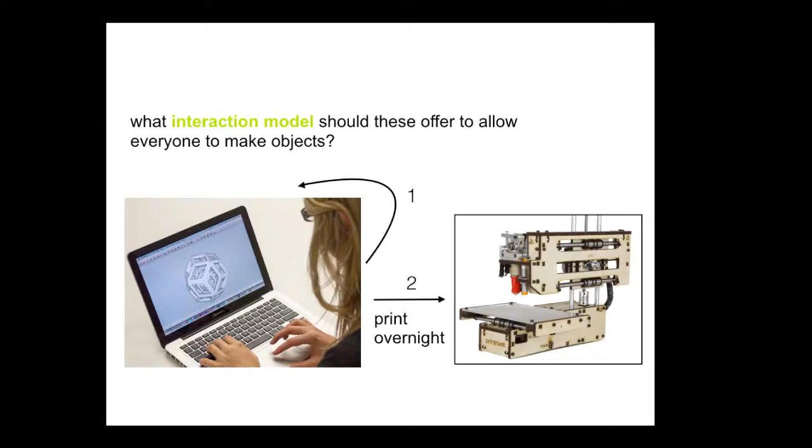The reason why we currently use this interaction model with the delayed feedback is because 3D printers are very slow. If you print something the size of the glasses, it easily takes a couple of hours. If you print something that's slightly larger, it requires overnight printing.

This overnight printing, overnight processing interaction model probably sounds very familiar to many of you, because we have seen this before somewhere else. In the early days of computing, users also had to first generate an input, then send it to the machine, and the next morning they could see the result. In case they made a mistake, they had to wait another night, try again, until they finally succeeded.

As you can imagine, since the feedback is so much delayed in this interaction model, it's really limited to expert users, because you really have to know what you are doing in order to succeed at the end.

However, in personal computing, we are today at a point where everybody can use a computer. So what did change in the interaction model?

First, when processing got faster, users could now work more in a turn-taking style interaction. They could type something in the command line, get feedback. If they made a mistake, they could try again quickly.

Then second, when we moved from expert command line tools towards more direct manipulation with the graphical user interface and natural user interaction, users could now work hands-on on the data instead of remembering all these expert commands.

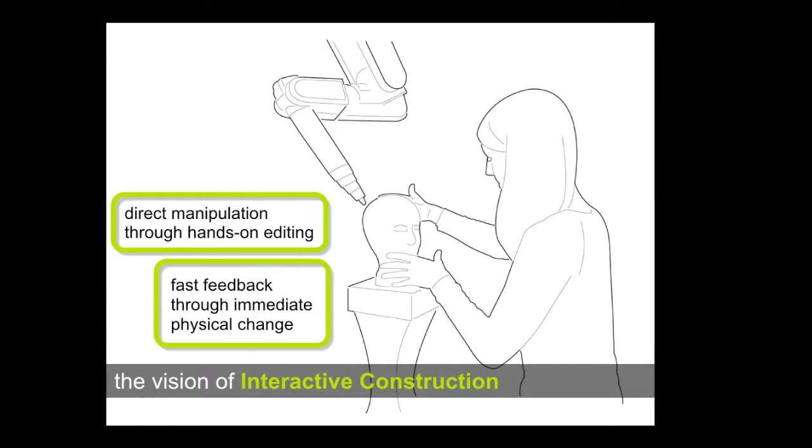So when I started my research, I started out with the general question: how can we actually make fabrication faster, because it's currently so slow?

And for this, I got inspired by the history of computing. When processing was slow, researchers suggested a method called low-fidelity rendering to give users an early preview.

So I applied the concept to fabrication. Instead of always doing a full, slow, high-fidelity print, I suggest that we only spend printing time on the part that's currently being tested,

and the rest is replaced with a low-fidelity context material. So you can see this idea: intermediate versions are low fidelity, and the final version is then high fidelity.

So I developed a range of low fidelity techniques for different prototyping goals, and I'm going to walk you through three of them. The first one was with a focus on modularity.

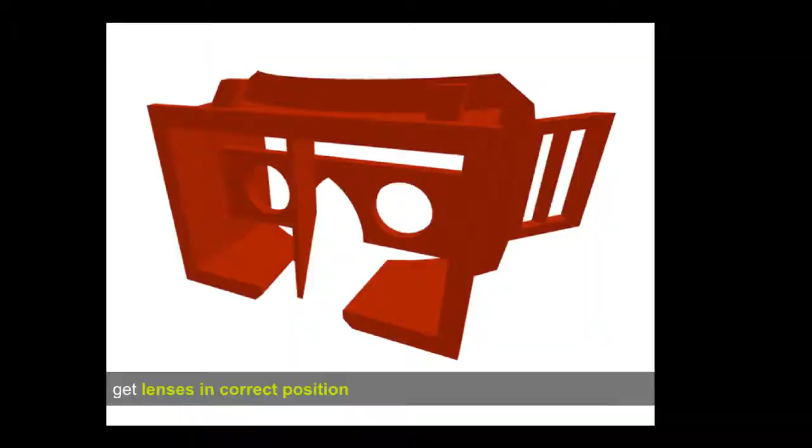So let's take this example of the head-mounted display body here. I'm currently prototyping this. It's a virtual reality headset. You attach your phone, and can experience some 3D stereography image.

And the first thing I want to find out is if the lens distance to the display is right. If the lens is too close, the image is blurry; too far away, the same thing.

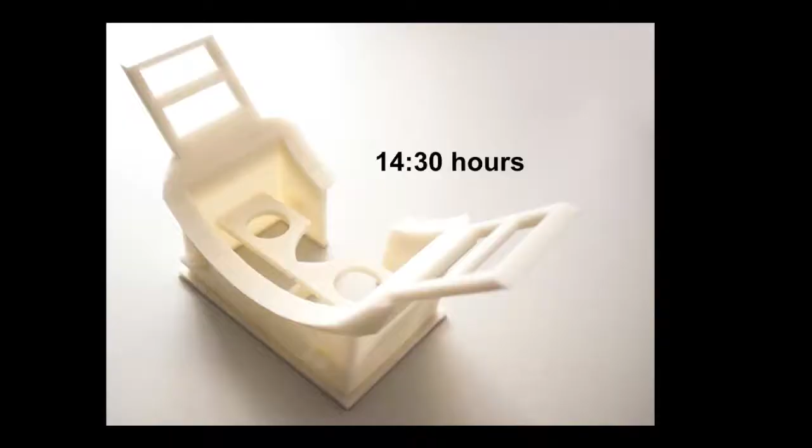So in a normal process, you would spend more than 14 hours waiting for the first version. However, here I decide to use our software. So I load the 3D model.

And now with just a few clicks, I can convert this into a low fidelity representation.

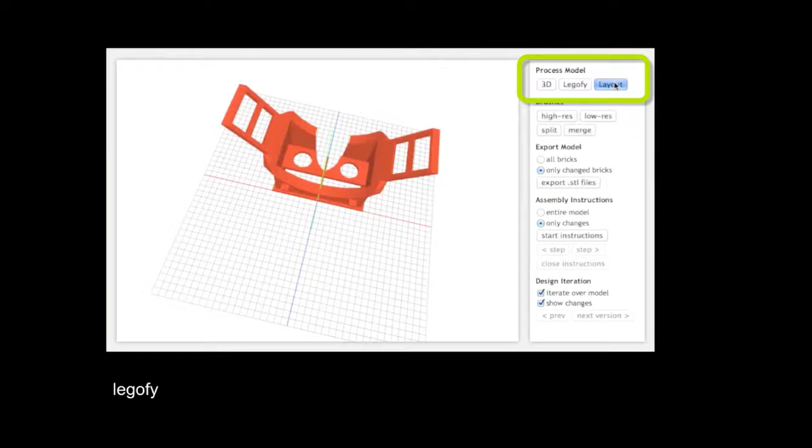And now that I have this low fidelity representation, I can go in and say, but here, this part I want to have high fidelity. Here I want to spend my time on.

So when I'm done selecting my part, I simply click the export button. I get the 3D printable file. You can see there's also an ID engraved.

And now while this part is printing, I can already start assembling and just insert the part once it's ready from the 3D printer. You can see there are on-screen instructions that tell me how to put the model together.

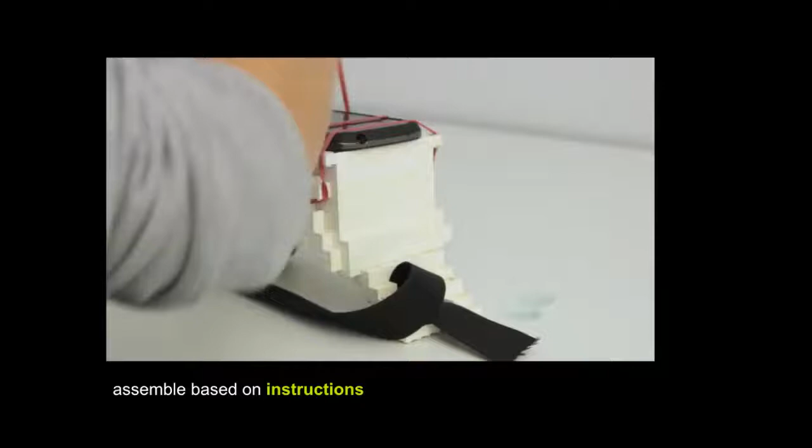So as I said, this is not a final version, it's an intermediate prototyping iteration version. And now you can have one where you can actually test the functionality in already 1 hour instead of waiting overnight to the next day.

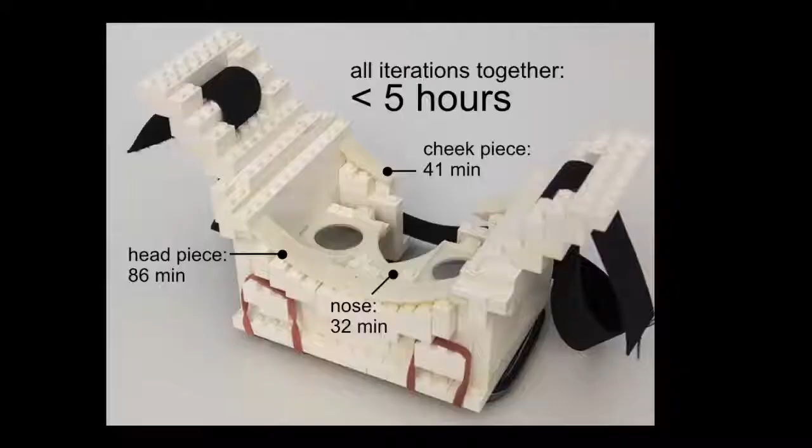And as you can imagine, this modular approach allows you to then take off parts and test different versions, for instance, for the forehead piece here, making it exactly the roundness of your head, nose piece, etc.

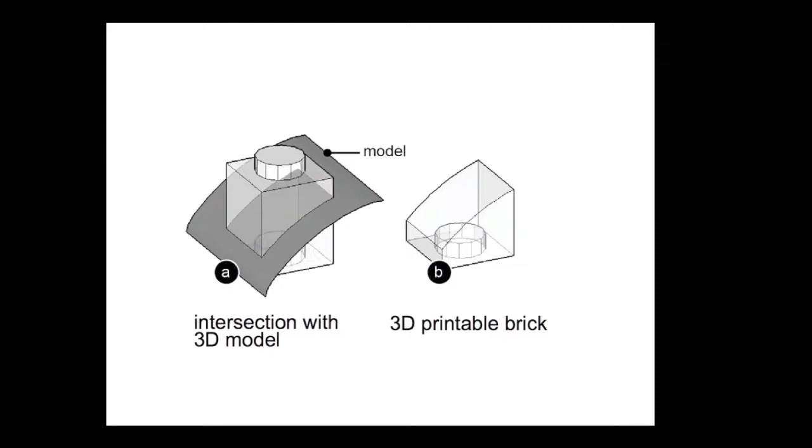Then also, when we generate the custom geometry for the bricks, we have to intersect bricks with the original model. And sometimes things can happen, such as that a part of a knob is cut off, which we then need to reconsider in our layout algorithm, because this knob cannot be used to create a stable connection.

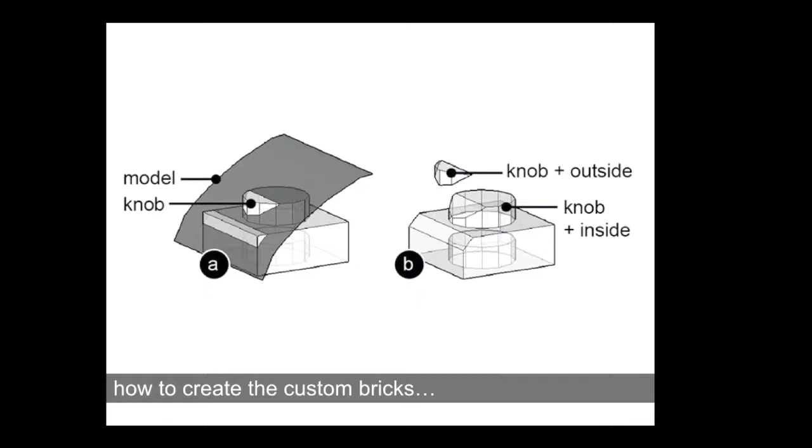So the Lego version I showed you was really great for modularity, but as you can imagine, especially when you have the head-mounted display on your head for a while, there are pull forces to the back. The bricks are very modular, but also fall apart after some time.

So we developed a second low-fidelity technique, which takes a 3D model and converts it into a representation for laser cutting of 2D plates.

So you can see the same model I showed you before, but now it only takes 20 minutes to actually fabricate a first version. And with our software, you can also select different conversion types that you want. For instance, here you can see that the head part is 3D printed, the rest is laser cut.

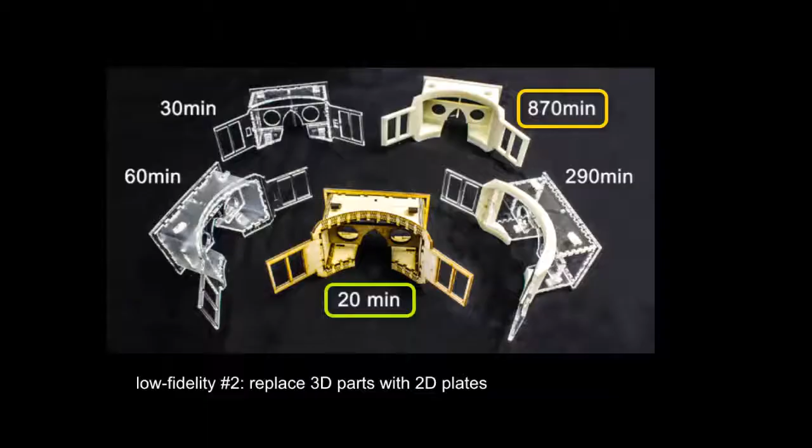So again, we provide a piece of software. You load your 3D model, and then you have one slider where you can drag from fidelity towards speed. As you drag towards speed, we replace more and more parts with parts for laser cutting.

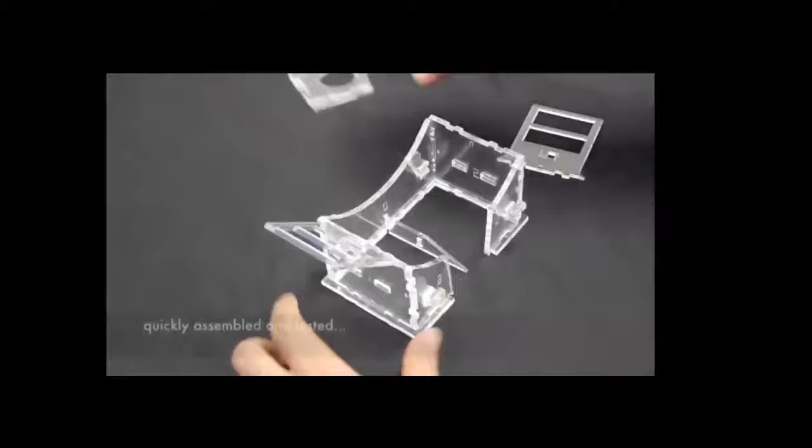What is always really important for me from the user interaction side is that the user does not need to have any low-level domain knowledge. He simply clicks the export button, gets the file, sends it to the device, gets assembly instructions, and puts it all together.

To find the plates, we first group all neighboring faces with the same normal, and then we look for planes that have an opposite normal within a certain distance d. This distance d is the laser cut thickness of the acrylic plates that your cutter supports.

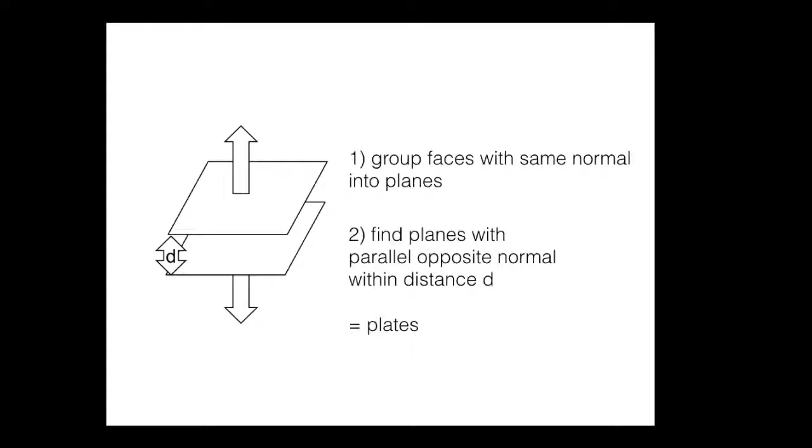It's mainly used for calculating the different conversions as the user drags the fidelity slider. At the beginning, you can see we are on high fidelity, so everything is labeled 3D print. But as we keep dragging towards speed, all these segments are then labeled laser cut.

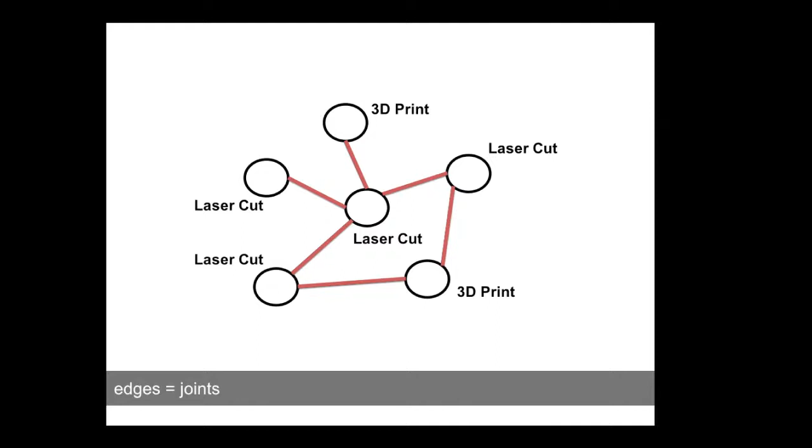Each edge then represents a connection between the segments. By default, this is just finger joints, so tabs that click together. But we also support something that's a one-dimensional bend.

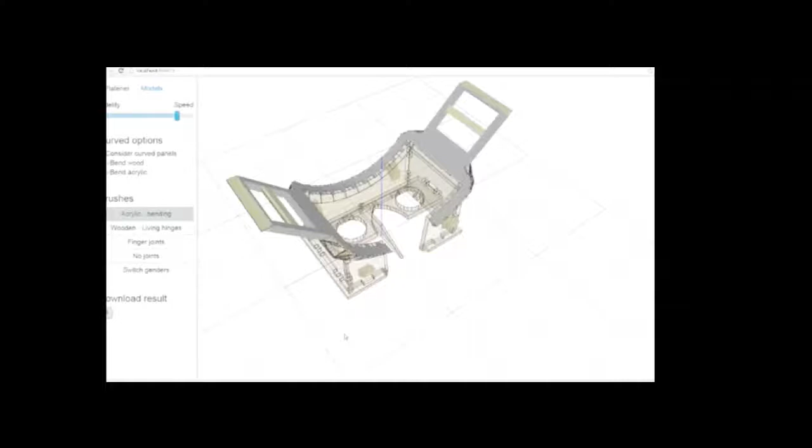If you have a heat gun which allows you to bend acrylic, you can simply go into the software and say this here should be bent. Then when you export that file, our algorithm flattens it. You can then laser cut it and bend it into the final shape.

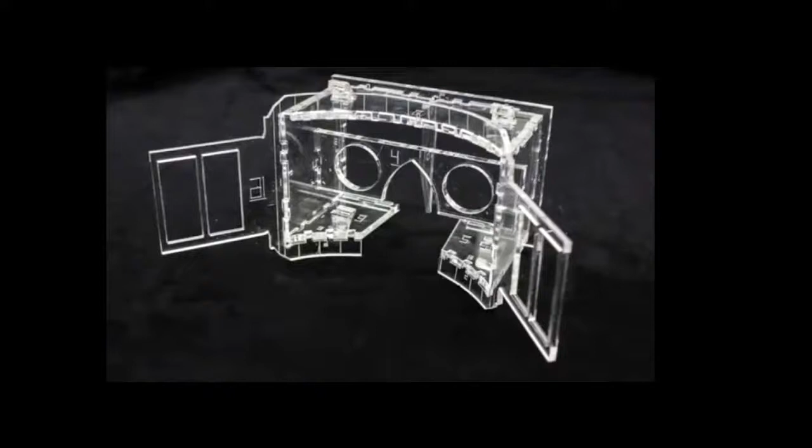In the case of bending, we also use the plate graph, but this time we also have to check if all of these segments are laying on a one-dimensional curve.

To evaluate our technique, we downloaded more than 2,000 meshes from Thingiverse, which is a 3D model database, and we automatically piped them through our conversion algorithm.

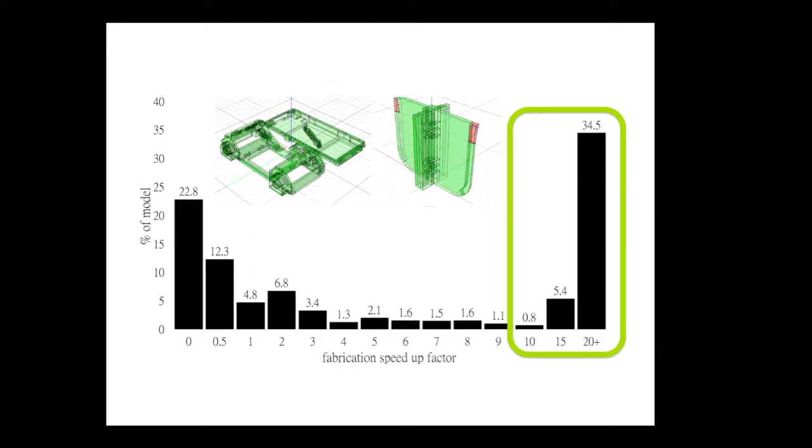We found that for more than 40% of the models, we have a speedup factor of more than 10 times. If you think about it, you can do 10 times more iterations in one day.

Of course, on the other side, there are also some shapes which don't work well. Anything that has a curved shape is really hard to represent on a laser cutter.

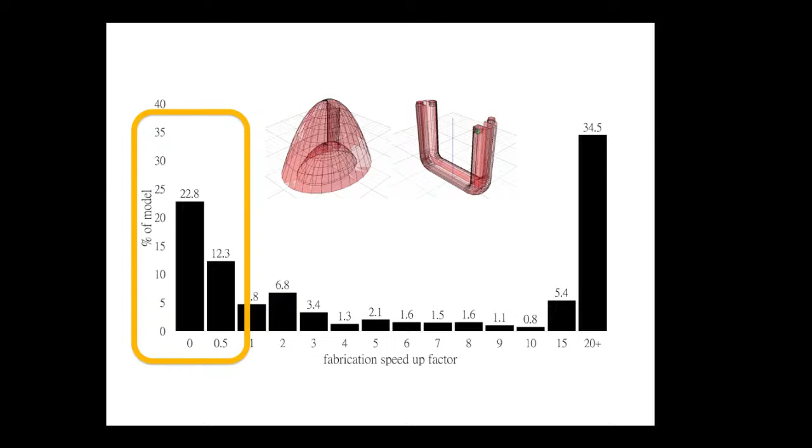Which actually brings me to my third low-fidelity technique I want to show you, fulfilling this matrix of different techniques, which is for shape objects.

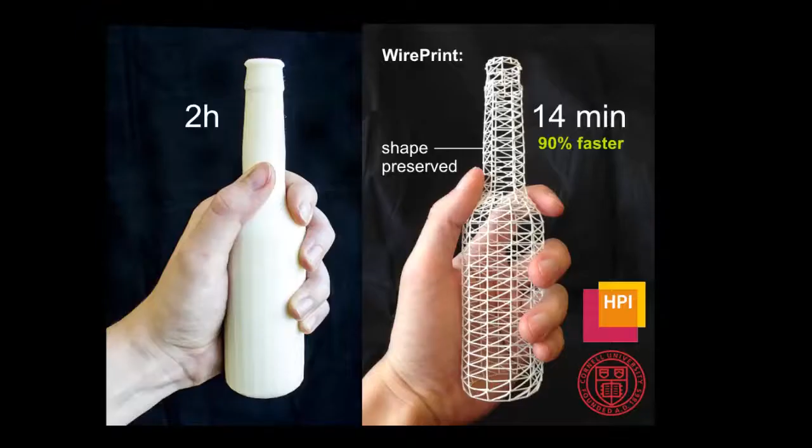So here you can see this. Instead of printing a high-fidelity version with a solid surface, we suggest printing a wireframe. In this way, you save more than 90% of the printing time.

The great thing here is, as you can see, the overall shape is preserved. So if you want to test something, like the ergonomics of this bottle in your hand, you can still test this with the low-fidelity version.

The reason why WirePrint is actually so fast is because we generated a special printing technique here. Normally in 3D printing, you print layer-wise, so it's like one layer on the next layer on the next layer.

But as you can see here, we also print in the Z direction, so we also print upwards. And this is what makes it so fast.

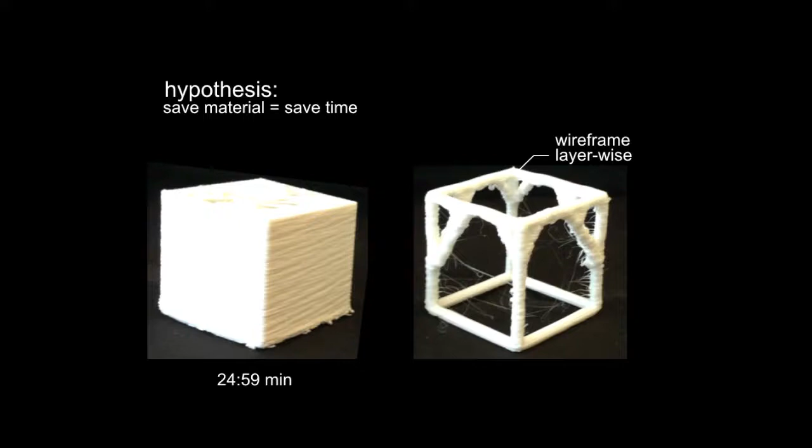However, when we initially started, this wasn't clear to us. Our initial idea was, okay, if we save material, we are probably also going to save a lot of time. So we printed this cube here layer-wise with solid walls, and the other one, a wireframe, also layer-wise.

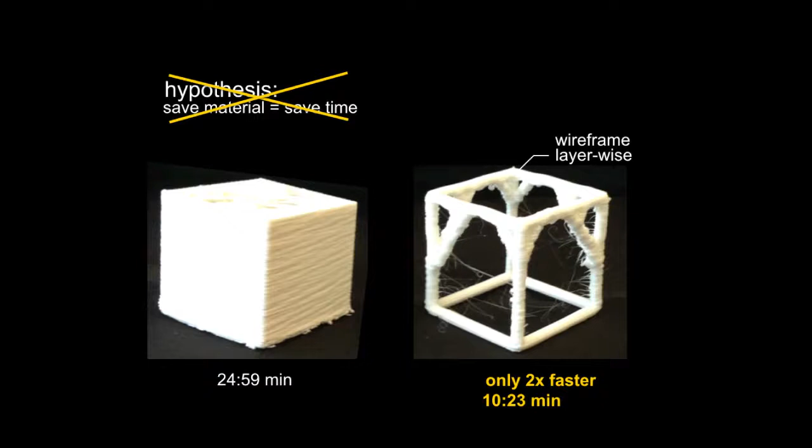What we found here is, wow, we save a lot of material, but actually the speedup is not that large. It's like roughly 2 times faster. So the question was, why is that actually?

We found out that the printhead still has to go to each corner on each layer. So the printhead path remains almost the same no matter if you print a wireframe layer-wise or a solid surface.

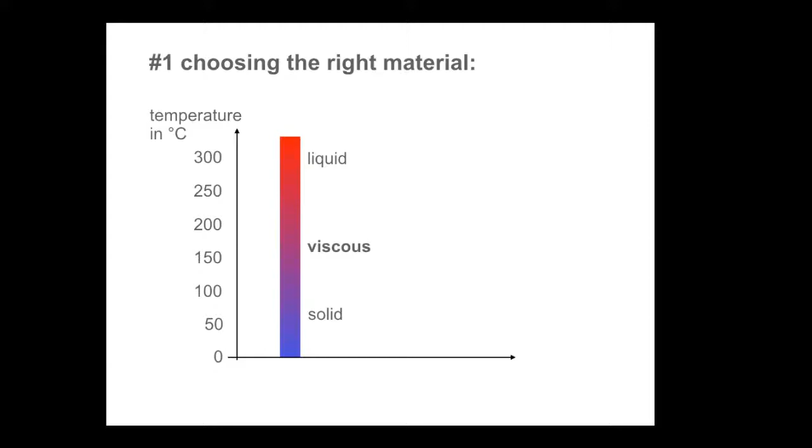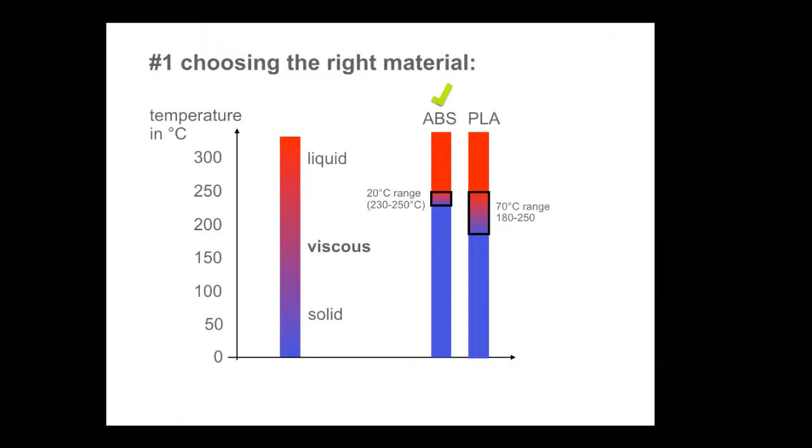So we found 3 ways how you can support the solidification. The first one is to choose the right printing material. Materials are not only liquid and solid, as we all know, but there's also a range where they are viscous in between. The right material for us actually has a very small transition range from liquid to solid, so it solidifies very quickly in that small range. In our case, ABS plastic worked best.

And then there's a third way how you can optimize the solidification. It's actually in software, so 2 ways. Either you print very slow as you go and you let the material solidify as you go, or second, you print very fast but you pause at the critical feature points, everywhere where you could get one of these potential deformations.

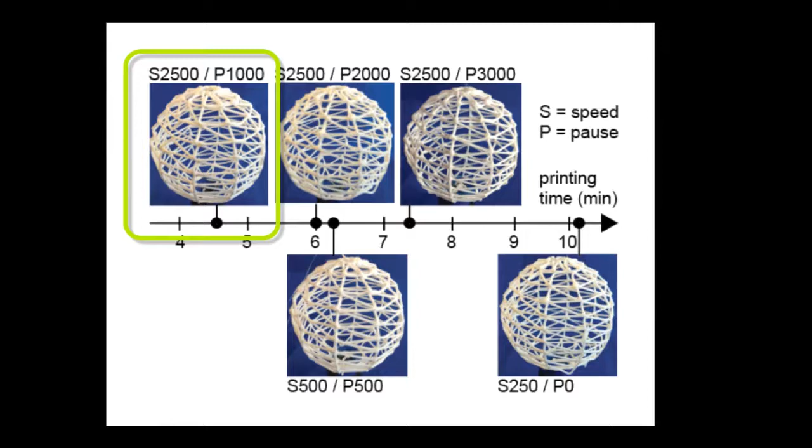So we ran an experiment where we varied printing speed and pausing. On the bottom right, you see the slowest printing speed, 0 pause. And here you can see fast printing speed, but a 1-second pause at all the critical feature points. And we found that this works actually best, so it has the smallest printing time while still preserving overall print quality.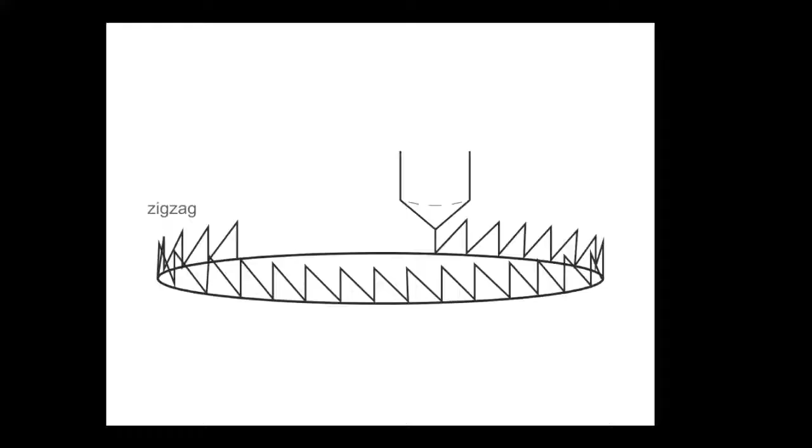Still, as you can see here, there are different conversions that fulfill these constraints of the print head. I'm just going to explain the one here on the left to you. So the new edge pattern that we use always prints a contour, then a zigzag on top, and then another contour on top.

This allows us to convert any 3D mesh that has a surface representation into one of our wireframe patterns. Some features I want to point out: we have different slicing heights, so on the ear you can see the top parts are thinner sliced than the bottom parts. We support geometry splits in the middle, so the head of the bunny here splits into the 2 ears. Then all of the vertical lines are aligned for extra stability, and on each slice we have a different number of feature points to represent the geometry.

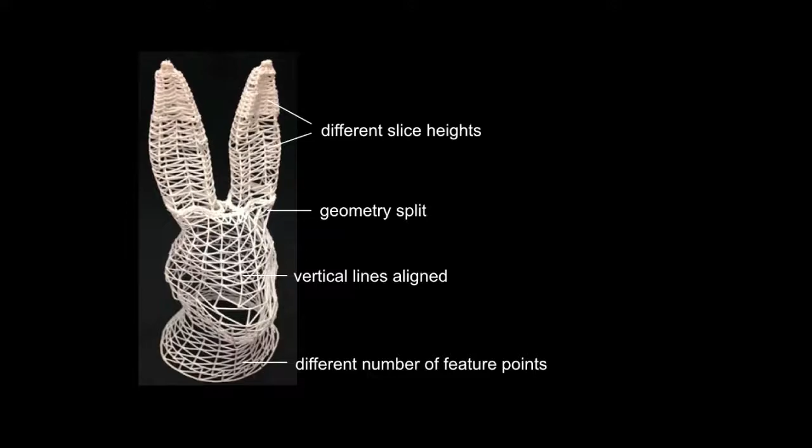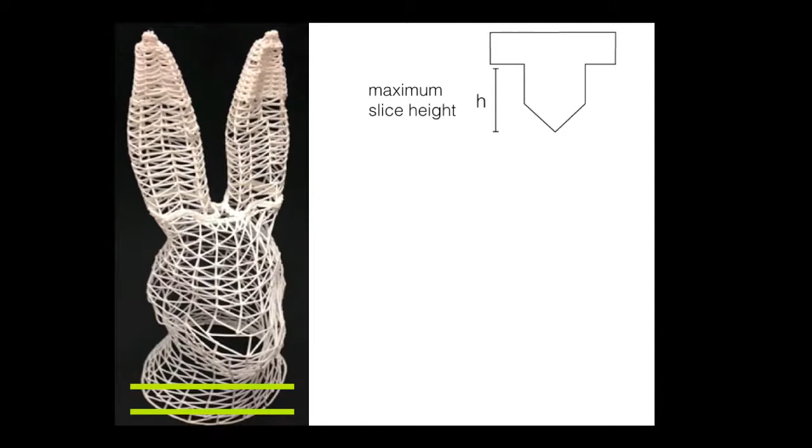So when we start the slicing, we always start with the maximum slicing height, which is again determined by the printhead shape, so if you can make the printhead thinner, you can also have larger slices. First we slice at the maximum height, and then we check what we call the fidelity angle. If that angle between the 2 slices is too large, so the geometry is represented too coarsely, we then slice at a much smaller height.

And what's very important, again, is that the fidelity angle is determined by the user. So there's a settings file where the user can say, OK, I want to have it this well represented, higher fidelity, less speed up, or lower fidelity, more speed up.

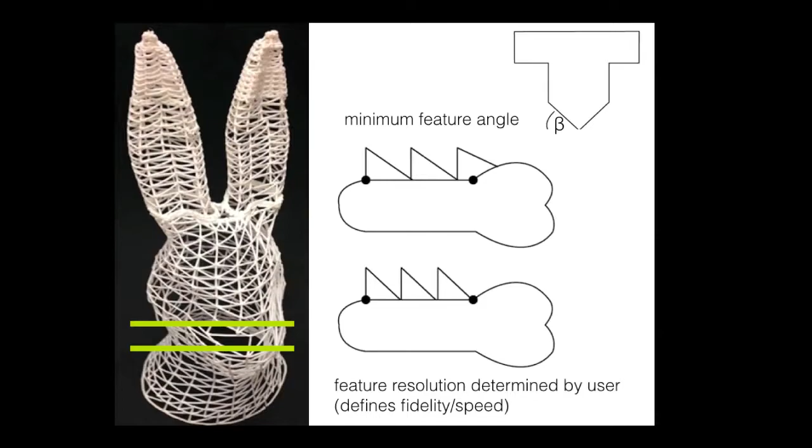We use a similar method for the feature points on each slice. There's a default angle we use for the zigzag, but then when we find out that there are 2 important feature points that need to be represented, we adjust the angle accordingly. And again, the feature resolution, so what is a feature point and what not, is determined by the user.

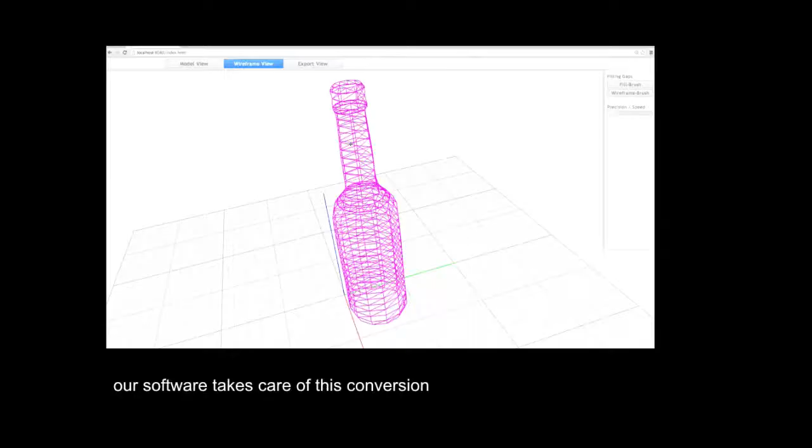So all of this goes into our conversion software. The user just loads the 3D model, then clicks convert and exports it for the 3D printer, and again, doesn't need to know anything about the underlying conversion knowledge there.

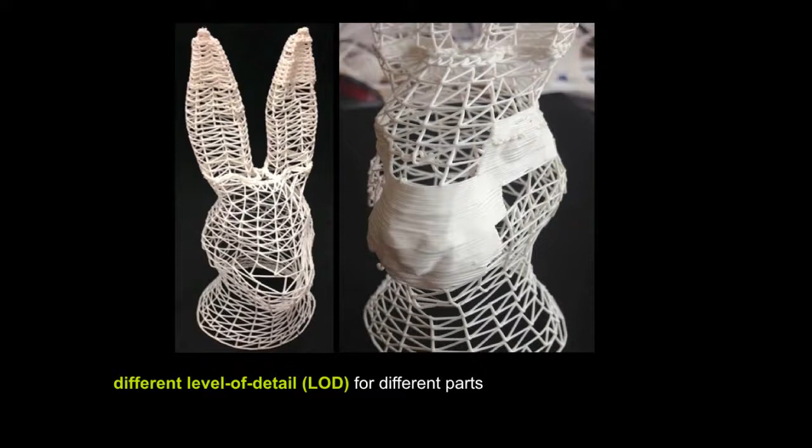So coming back to this comparison I made at the beginning with the low fidelity rendering, we can apply different methods from there also to our low fidelity fabrication. So you can, for instance, say this part here should be high fidelity and then the rest is low fidelity.

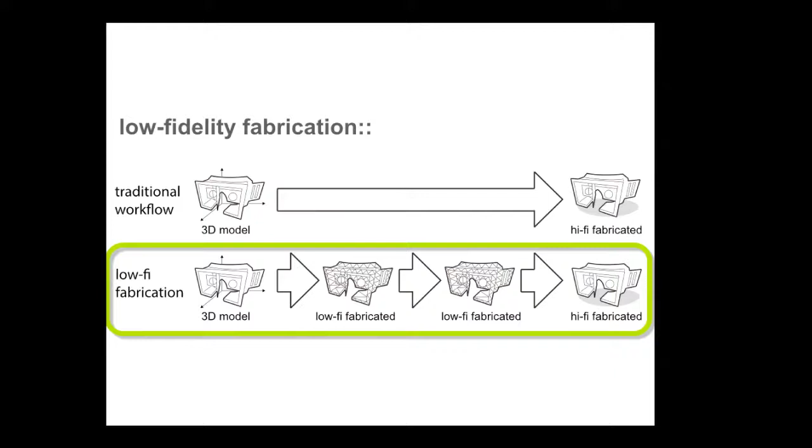All right, so I showed you this concept of the low fidelity fabrication. And when I did this project, I was very proud of myself. I was like, wow, 10 times faster, 40 times faster, so many more iterations you can do in a day, that's great.

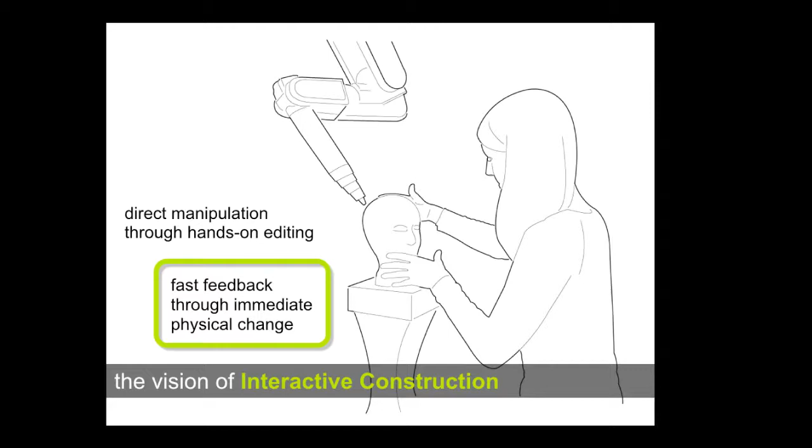But if we zoom out back to the vision I showed you at the beginning, it's not enough to have this real-time physical change that enables this interactive construction. So I took a step back and thought about how we can actually achieve this speedup, and why is it currently so limited in terms of 10 times, 40 times, but why can we not go like 100 times or 1,000 times faster?

One thing I understood is that all of the methods I used so far, they used adding or subtracting material. So each time you make a change, you actually have to add the material or remove the material and then recreate the new geometry.

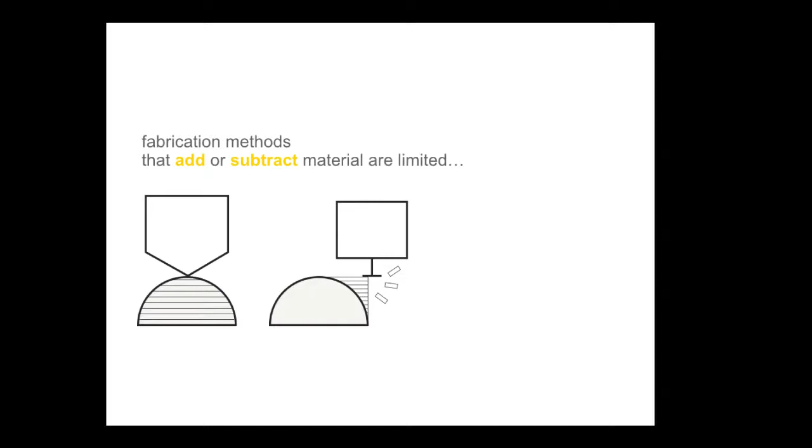So one thing I understood is that for my interactive construction approach, reshaping the material is the solution. Let's imagine this being a flat sheet, and you apply some pressure and reshape it into this shape. So here you can see one example: let's say we make it a sphere, and when you make it smaller, you don't have to remove the material, you just unstretch the material back into the shape.

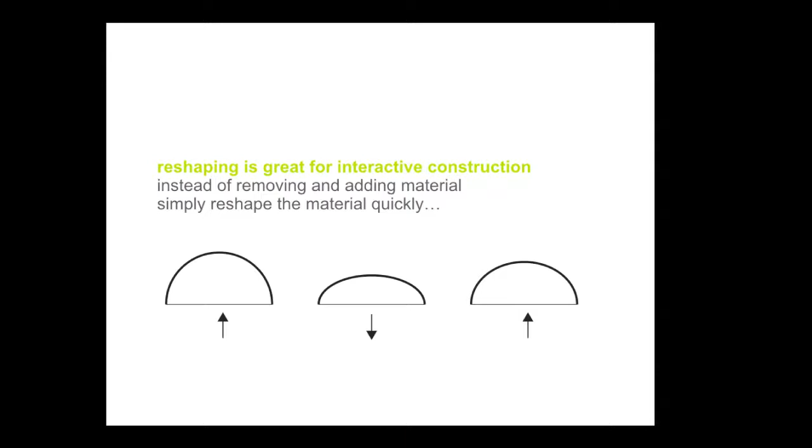So I'll tell you more about this in a minute, but I wanted to zoom out first to the second aspect, and then at the end combine the two views again.

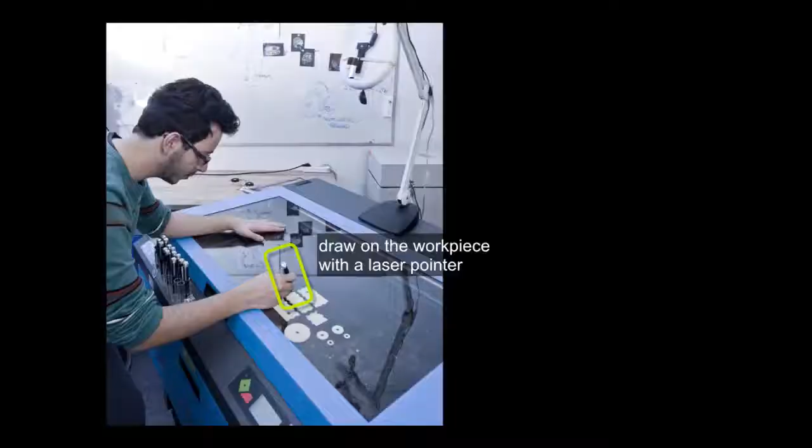So when I started with the direct manipulation, I started out by looking at 2D, and for 2D I used the laser cutter. So here you see one system I call Constructable, and instead of using a digital 3D editor, users directly stand at the laser cutter and use a laser pointer to draw onto the workpiece.

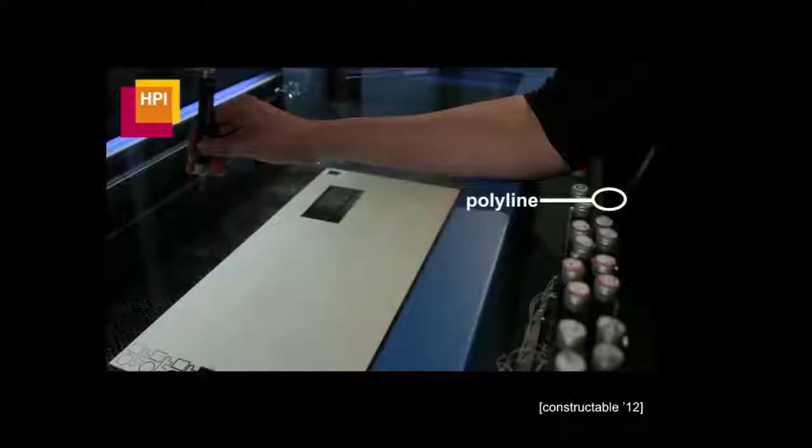So I'm going to show you how I make this booklet here with the system. Here I take a laser pointer which only makes straight lines, and I draw the outline of the booklet. As you can see, as soon as I let go, the laser cutter immediately follows and cuts.

Now I take a different tool, which is called the round corner tool, and I cross off the edges. The Constructable system will make sure that all of these corners are made in the same way.

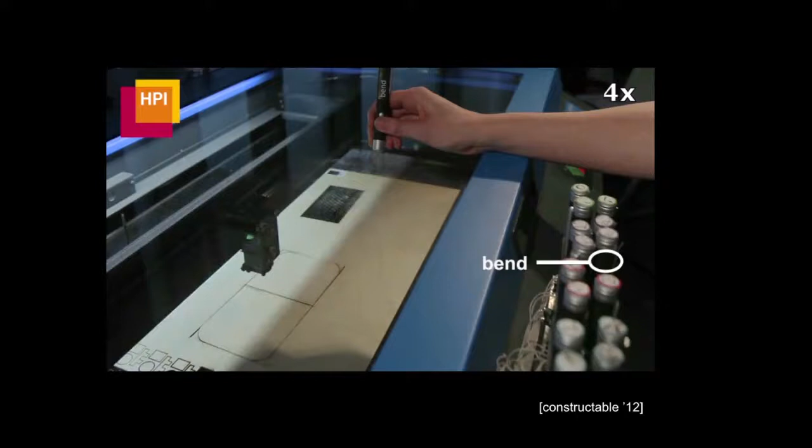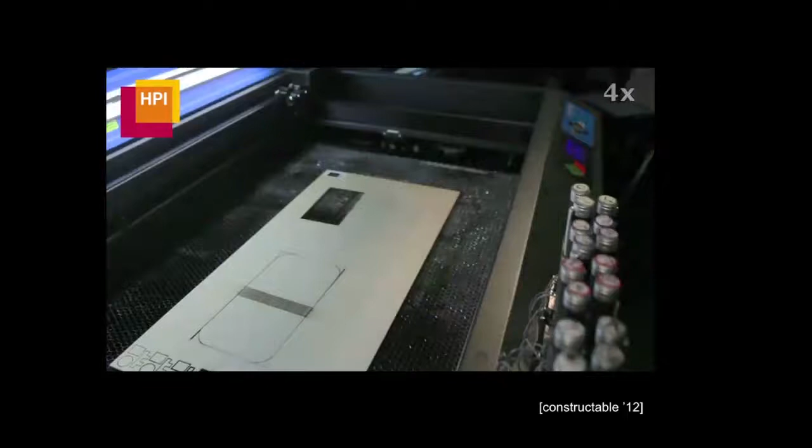Here I take the bend tool, I just draw one line in the middle, and the system will create a flexible pattern that allows me to fold this booklet. So again, the user does not need to know anything about the underlying pattern. He just needs to use these tools, and those patterns are created based on what the user has been drawing before.

At any step of this prototyping process, the user can take out the workpiece, test it, come back, put it back in the laser cutter, and continue.

So the way we achieve precision is by using constraints embedded in these tools. There's one tool for only straight lines, one tool for making the bend, one tool for making the round corners, a bit like what you know, for instance, in Photoshop or other editing programs.

So we use off-the-shelf laser pointers. Middle button turns the beam on, and then we reprogram the front button to mean cutting, and the back button to mean something that we call a sketch line.

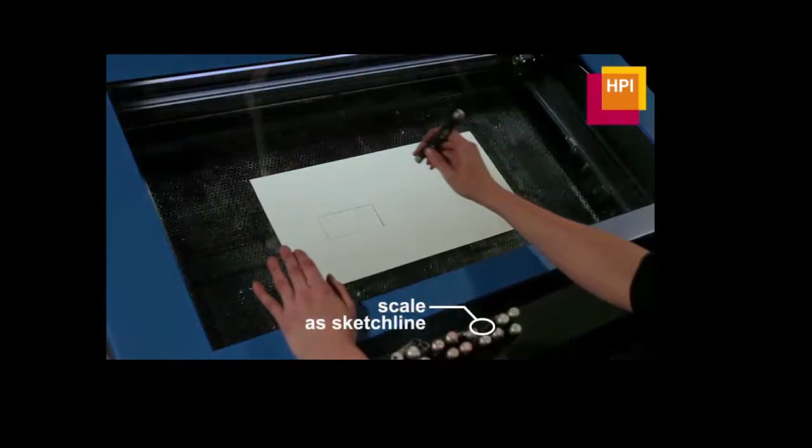So a sketch line is something like a thin line on paper. When you're not yet sure or you just want to create an alignment aid, you can hit the sketch line button, and it's going to not cut through, but just engrave a little bit into the material.

And now here I'm making a box, and you can already see the base plate. And when I now extrude the side walls, they will all have the same height because they are based on this alignment aid.

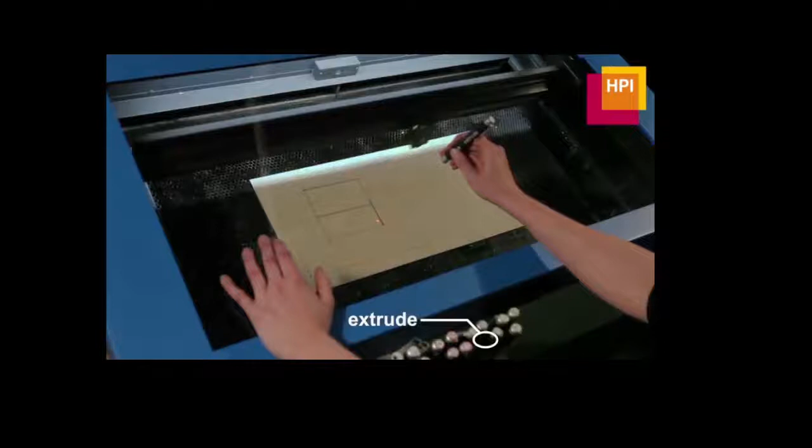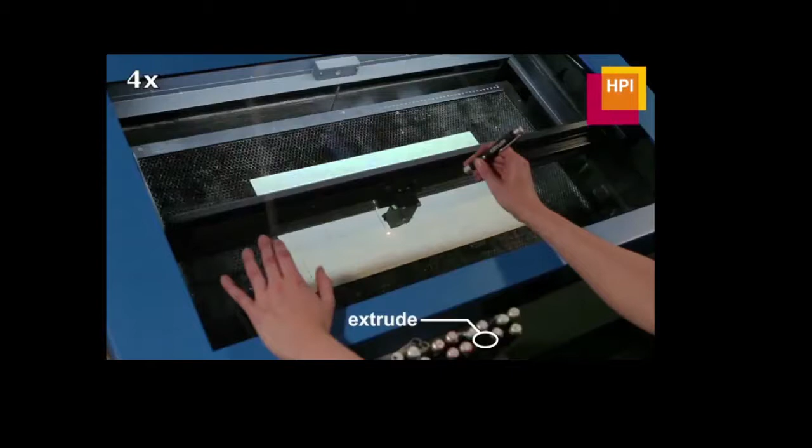So from the hardware side, Constructable is based on an overhead camera which looks at the laser pointer drawing and also observes the workpiece when it's being put back in. Then we have an IR receiver which gets the laser pointer commands.

We have a toolbox with tool detection based on an Arduino and some switches. And then we also query the magnetic switch on the laser cutter. So each time you open or close the laser cutter, we can detect if you have been taking something out or put something back in.

So here's a simple example how Constructable tracks and beautifies what the user has been drawing. We use computer vision and color tracking to get the laser pointer drawing, then we apply shape recognition with a sketch recognizer.

Since we have a camera in the system, we can do also other things, such as this great feature here, which is my favorite. We can also copy the shape of existing objects.

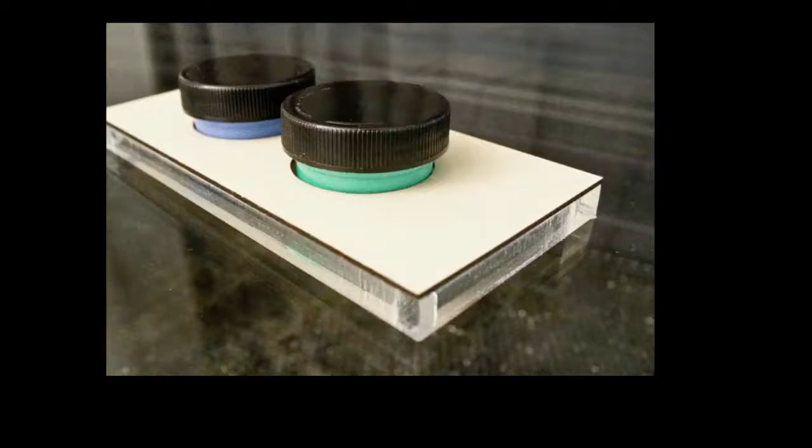So here I put in these two jars, and I take the trace tool. Just say copy, copy. And now when I take them out, the cutter will actually come and cut exactly those outlines there. So I don't have to measure, go to digital, go back to physical. I can do everything in the physical space exactly where the objects belong.

So I showed you the Constructable system, but it was 2D, right? So the next question would be, how can we actually move this towards a 3D physical editing tool?

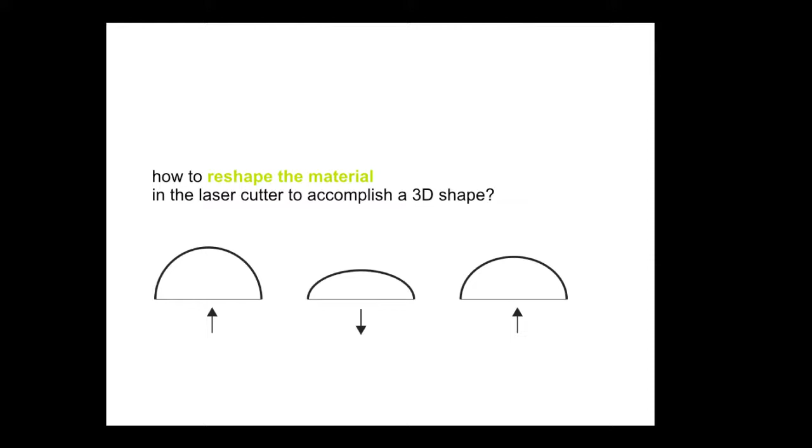And for this, I want to come back to the slide I showed you before with the reshaping of the material. So for me, the next question was, how can we actually use the laser cutter to reshape the material into a 3D object in the 2D cutting system?

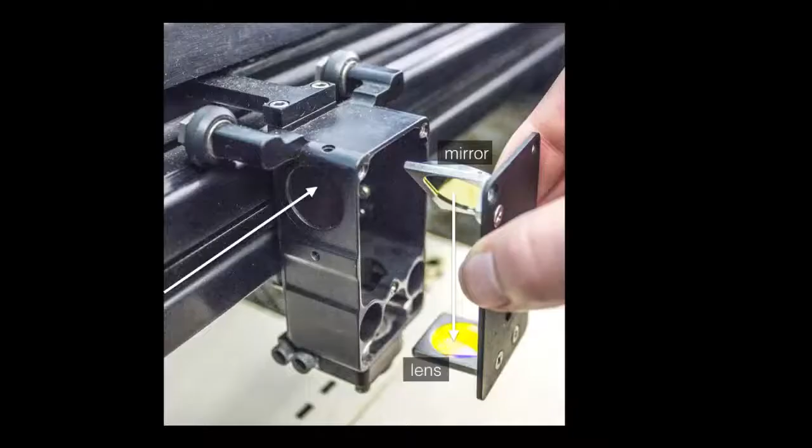So here's how a laser cutter normally works. Laser beam comes out from the back, then there are a couple of diagonal mirrors directing the beam, and then at the bottom, there's a lens which focuses the laser on the workpiece.

So when the laser is focused, as you can see here, it's cutting through the material. So one idea we had is that when we defocus the laser by moving the workpiece away, we are not cutting through anymore. We just warm up the material, and then it folds down and bends into a 3D shape.

So here's one example, a pen holder that the user makes. And again, just takes one tool, says bend here.

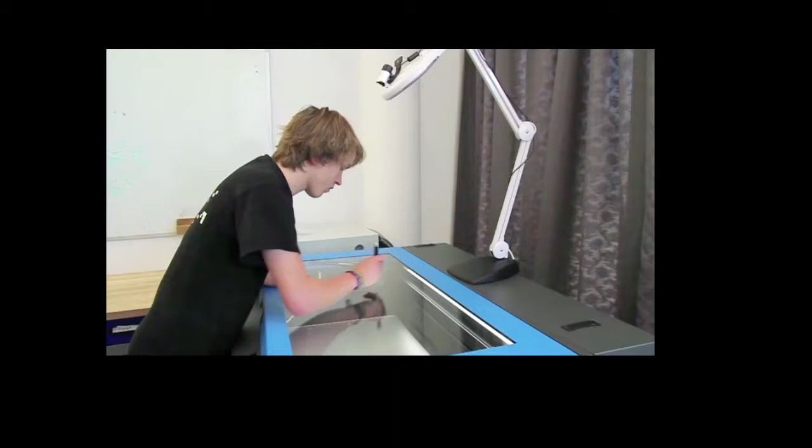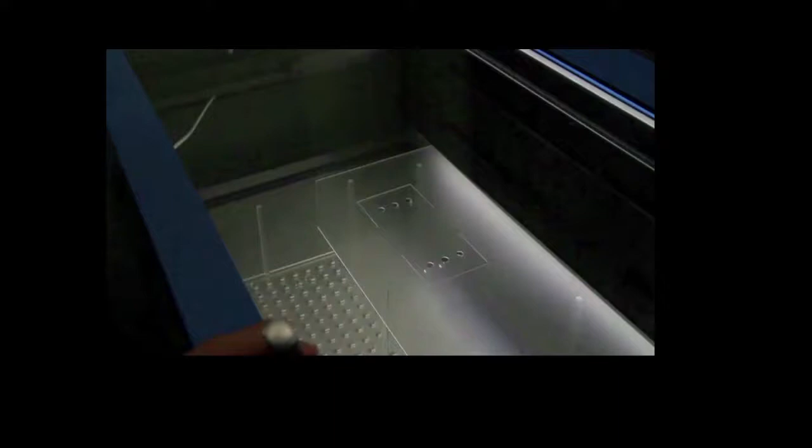And the system knows that it has to defocus the laser now, so you can see the workpiece moving down. And it also knows that for this size of a bend, it has to move the laser so and so often back and forth with a specific power and speed.

So to show you one other design element we support, it's not limited to 90 degree bends. We can also do, for instance, a parallel suspension. The way this works, 4 arms in the corners.

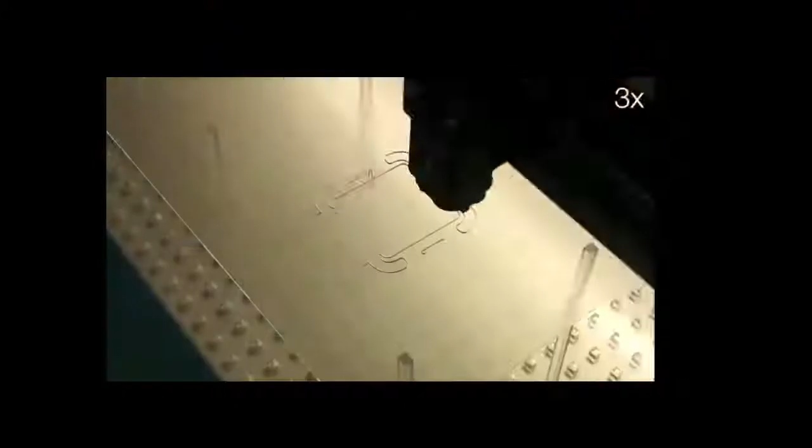And now we defocus. And now that we warm up the arms, they really unfold like an elbow.

So now we move back in focus and simply cut it off.

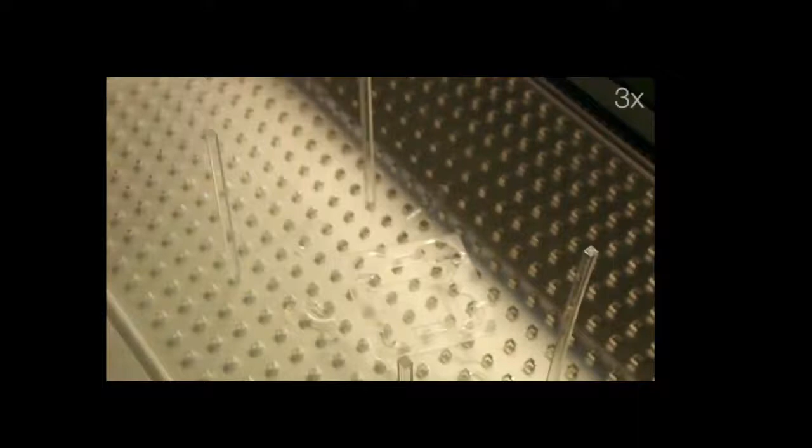And then you can see that this was the day of the paper deadline, because we used a cable to hang up the plant.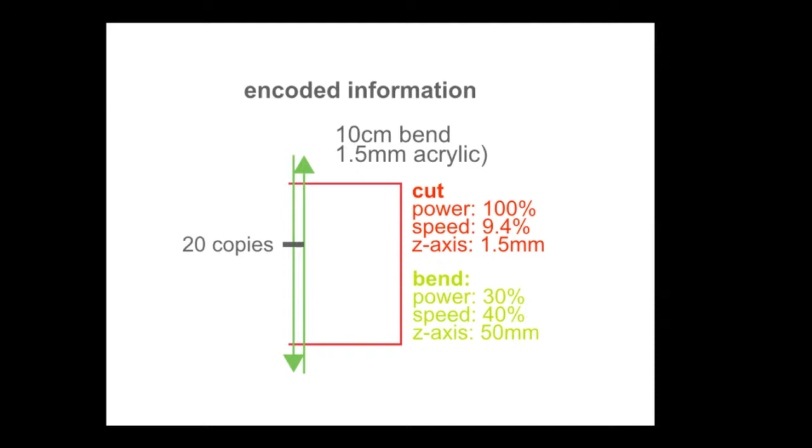All right, just to give you a bit of an understanding of how it works internally. So the lines for cutting and bending are encoded into a 2D drawing. Red, for instance, means cutting, and green means bending. The number of lines simply determines the path the laser is going to take.

This line drawing is automatically sent to the laser cutter software, which you can see here. In the laser cutter software, different laser settings are determined for each color. So here you can see, for instance, for red, the Z-axis setting, which moves the table up and down, is 1.5 millimeters, so it's in focus. Whereas for green, it's 5 centimeters away, so it's in defocus.

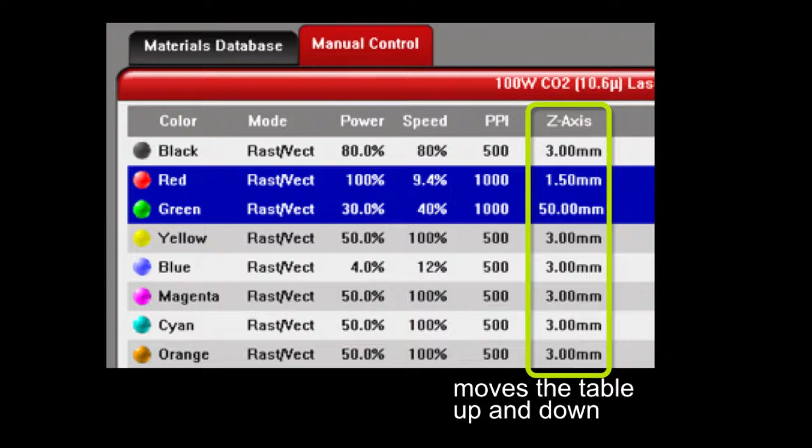Our initial version of the system used a data-driven approach. We sampled different heat, power, and speed settings for different bends. But the current version of the system uses a closed-loop system with a thermal camera observing the temperature, because acrylic bends best at 110 degrees Celsius.

If you're interested in this line of work, we also have a second project called Laser Stacker. For both of these projects, we've developed a calibration routine which works on your laser cutter. So if you want to give this a try, you can go to our papers, and it will tell you which settings to use for your given laser power.

So the technique I just showed you pushed a bit more towards 3D, but as you saw, it was limited to origami-like geometry. So the question is, how can we make this really 3D?

For this, we looked back at what characterized laser origami. The path was a 2-axis motion table. Heat came from a laser. And the force was determined by gravity pushing the workpiece down with its own weight.

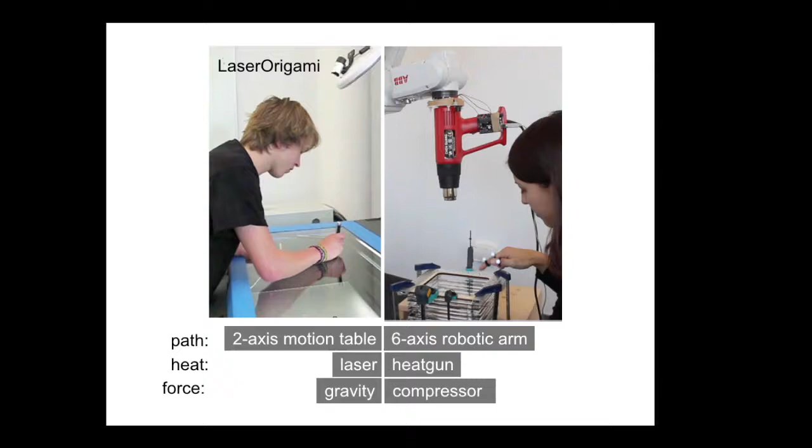So to give this more degrees of freedom, we built a system based on a 6-axis robotic arm. Heat now comes from a heat gun, and the force comes from a compressor pumping air into the workpiece.

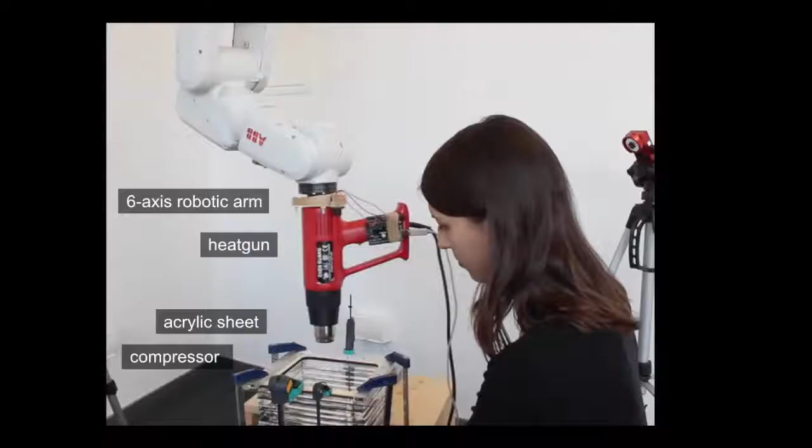Here you see a user, and she indicates she wants to have this circle here warmed up and reshaped. Now we warm up the area, and you can see how the material becomes compliant. Now she can actually go in there and pull the material out.

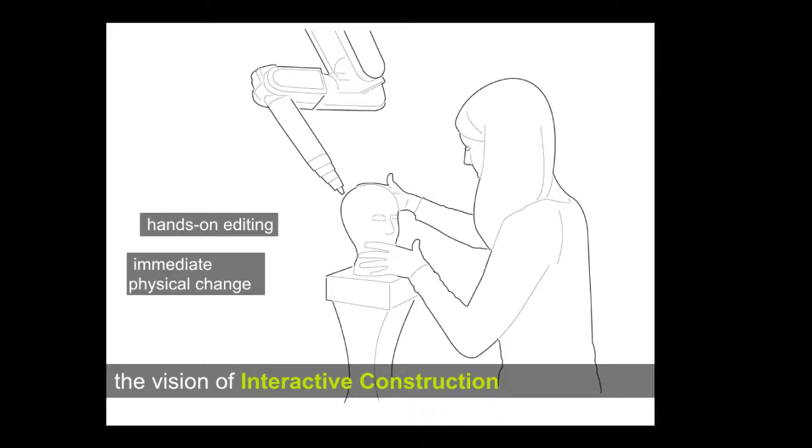So at the beginning, I showed you this vision of hands-on editing, kind of pushing and pulling on the material. And with this more formative fabrication approach, we get very close to it. Users can work hands-on on the material—they pull it out, push it in, and they receive immediate physical change based on what they are doing.

As you can see by the simple shape we are showing here, this is currently work in progress. There are a lot of optimizations we can still do. One is, for instance, you saw that the heating still takes a while, but we think we can actually get to a transition within just a couple of seconds.

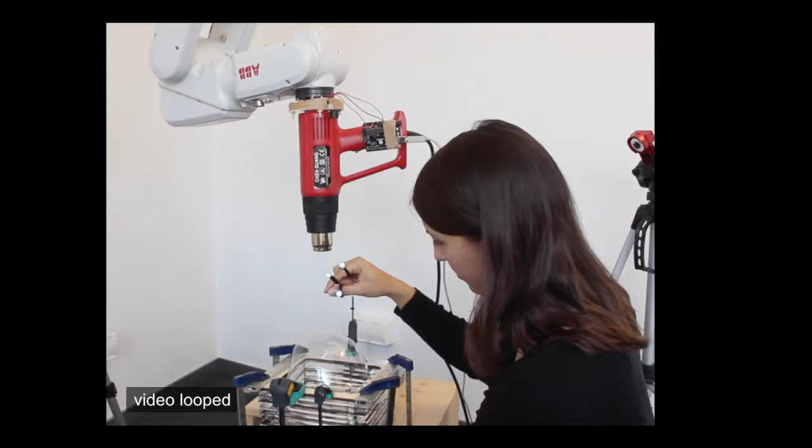The way we want to do this: currently the material is at room temperature, so it takes a while to actually get it to the point to make it compliant. But if you preheat the air within the workpiece, just below the transition point, we can make the transition in just a few seconds. Also, the shapes are currently very simple because we only have one size of heating mechanism. So once we are close to this transition point, we want to use an infrared LED array where you can individually address the different LEDs, turning them on at different heats.

Behind the scenes is this software system here. We run a physical simulation of what we are going to accomplish in terms of shape, then instruct the robot arm to move a certain path with the heat gun at a certain temperature, and also turn on the compressor to pump the air in at a certain rate.

However, as with any system that involves some real-world aspect, the simulation is never perfectly precise. So we also measure with a distance sensor and a heat sensor how the material is actually developing, and feed this back into our physical simulation.

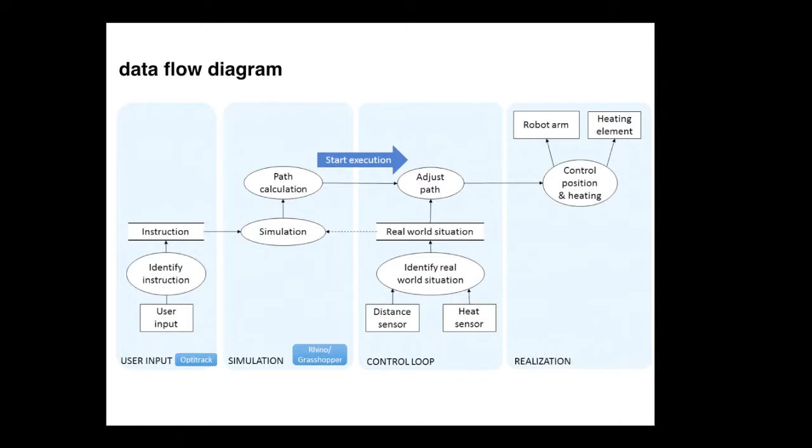So I showed you at the beginning my vision of interactive construction. I believe that when we can make these shapes more complex, we get very close to this pushing-pulling system. Also, with the compressor pumping positive air, we can also have negative air, so we can pull parts back in. With this, I want to move towards where this is going in the future.

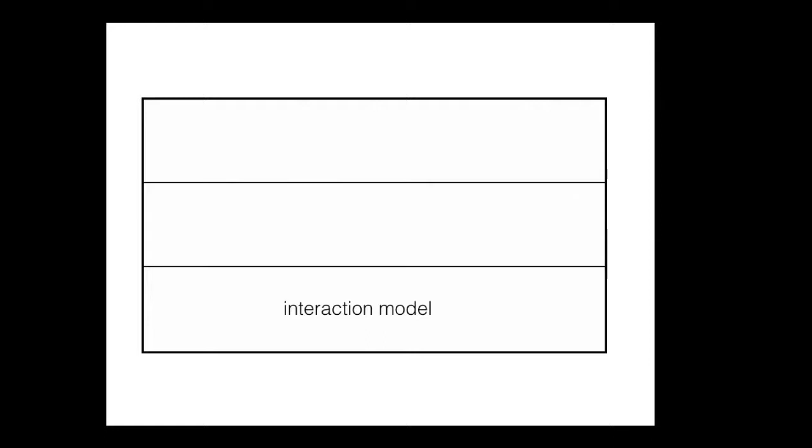So I showed you at the beginning my very long-term goal that I want to allow everybody to create complex physical objects. I showed you this new interaction model of physical editing directly in the space. But the next question on top of this is: how can we allow people to create more complex objects? Because all of the objects you have seen so far were pretty simple. So how can we create objects that require advanced domain knowledge that the user normally does not have?

One insight I gained is that users are really bad at designing from scratch. It's kind of this white paper phenomenon - people don't know where to start from. So I believe that the future of fabrication will actually lie in the remixing of existing designs.

The problem today is that yes, there are these 3D model databases, but you cannot remix any of these models because they are plain triangle meshes. There's no metadata attached.

So to enable this remixing of physical designs, I want to create an ecosystem of reusable parts. As you can imagine, if you remix two digital designs, it's already very difficult. But if you remix two physical designs, mechanical properties and material properties also play a role.

Just take a chair, and you want to add a leg to this chair from a different design. This leg now needs to know how to reshape itself to support a certain weight. Same thing if you change the material of that leg - it will also change how the geometry needs to support that weight now.

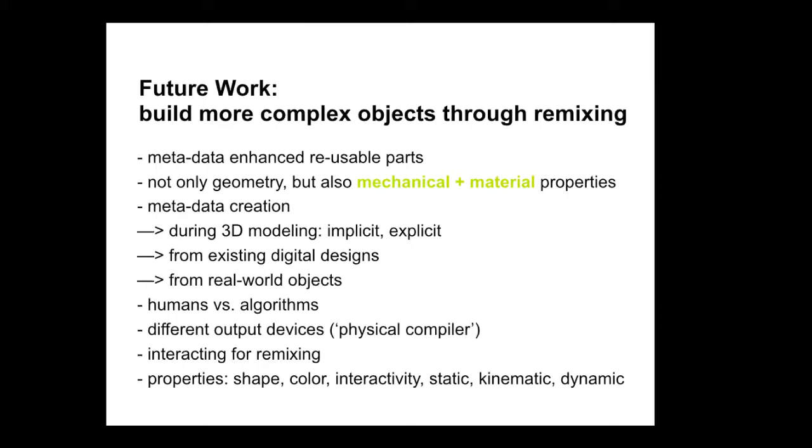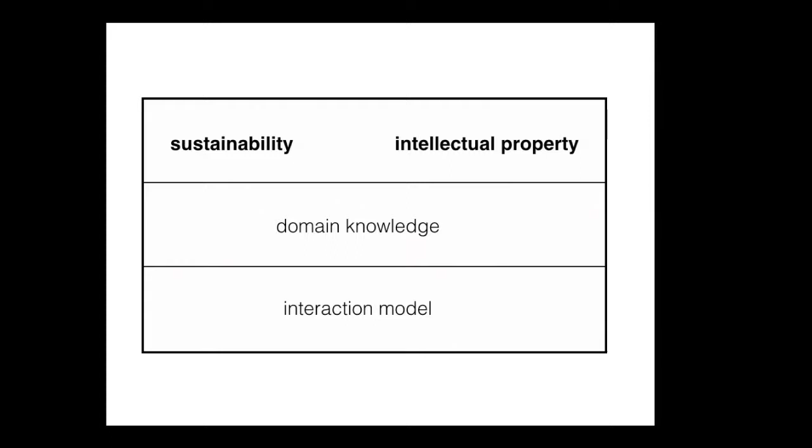At a very high level, we can also start thinking about sustainability and intellectual property. What does it mean when everybody can create physical objects very easily? Physical objects require material, they create waste. Can we design with reusable parts? Or can we have a physical undo, for instance?